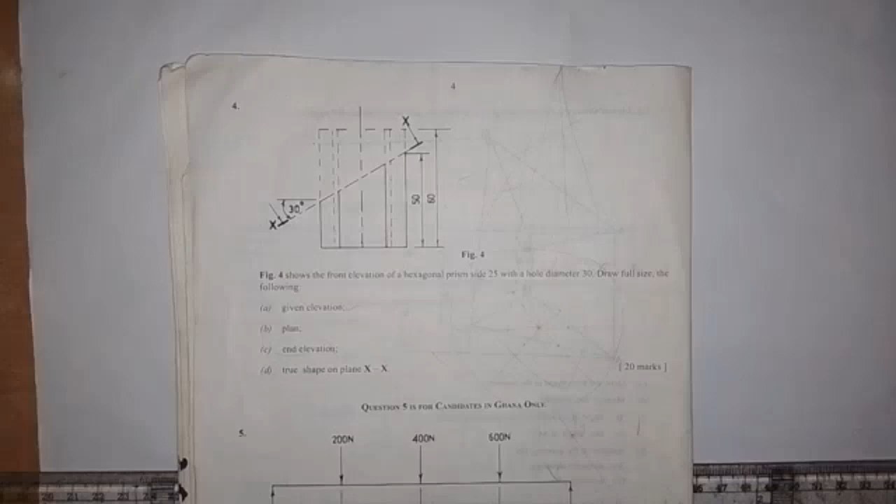Here we are going to solve this particular question, as you can see on the screen. Figure 4 shows the front elevation of a hexagonal prism, side 25, with a hole diameter 30. Draw full size the following: A, given elevation; B, plan; C, end elevation; and D, true shape on plane XX. So we'll be showing you how to solve this particular problem.

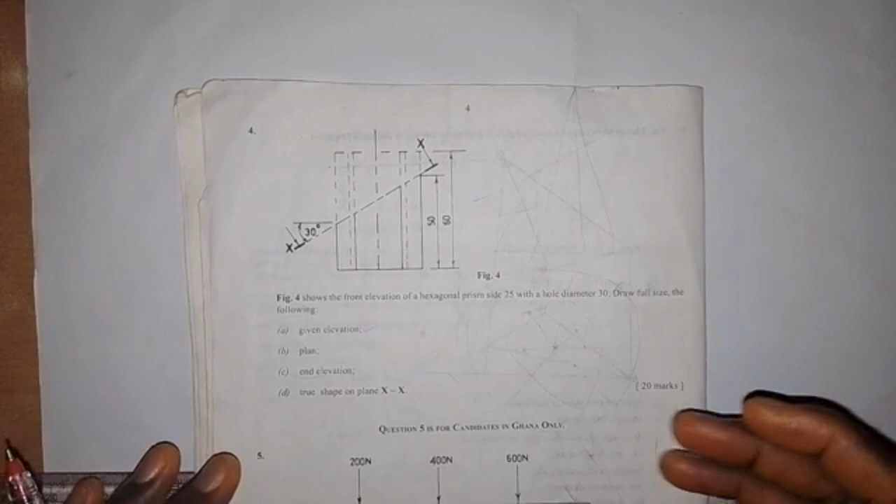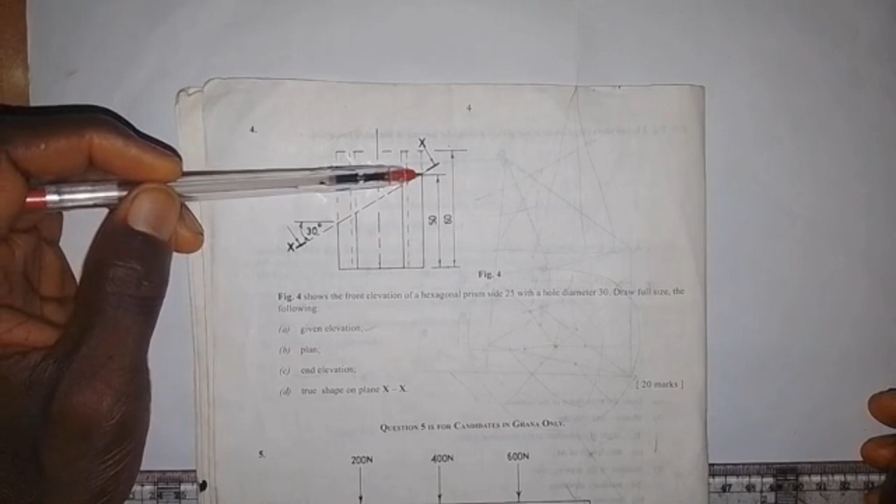Okay, so now let's do what we're asked to do. But before that, the height of the prism is 60 millimeters, and the cutting plane touches this point, and the distance of this point from the base is 50 millimeters. The cutting plane is inclined at an angle of 30 degrees to the horizontal, as you can see there.

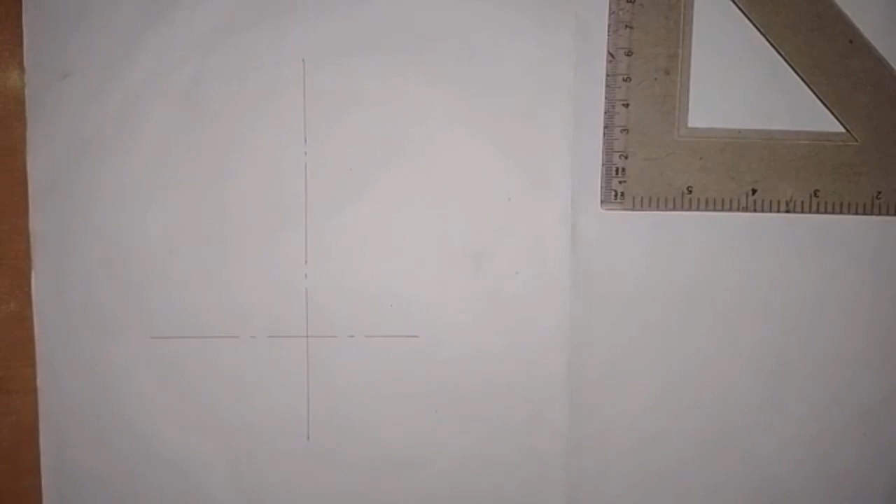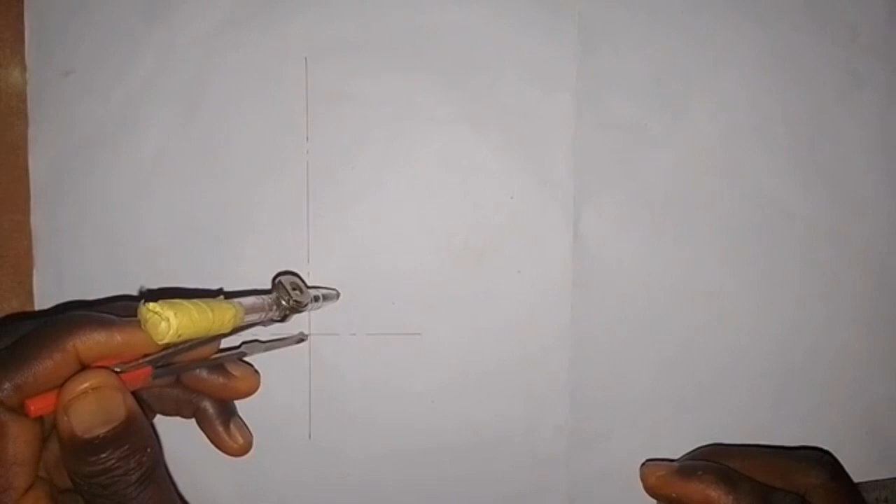So what we need to do first is to draw a vertical center line. So we draw a vertical center line, you can see it here. Then we also draw a horizontal center line. Then we take a measurement of 25 millimeters, which is the length or side of the hexagonal base of the prism. So we put it at this point and we draw a circle like this.

Then I will need to extend this line. With the same radius that we used to draw the circle, we put it at this point, then we make an arc here and down here, and at this point also with the same radius, make an arc here and down here. So I'm going to number these points: point 1, point 2, point 3, point 4, point 5, and point 6 here.

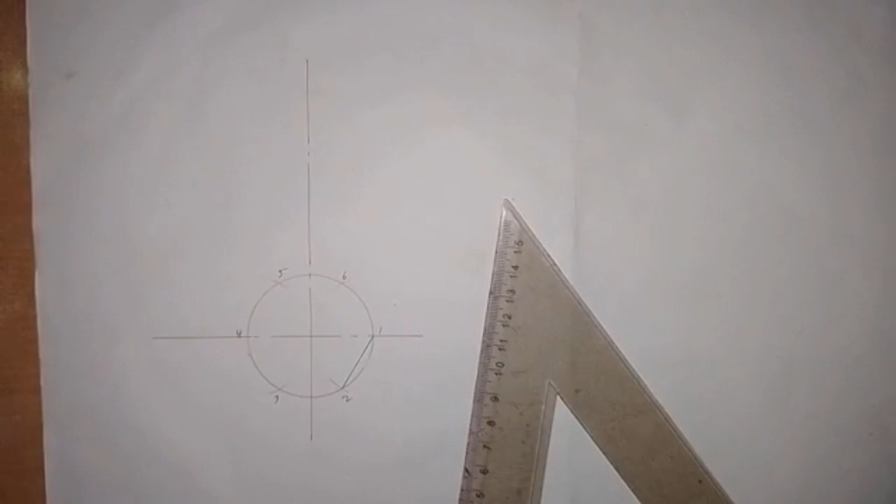So we join these points together to form the hexagon, like this. I'll pause the video and quickly do that. Alright, so I've produced the hexagon as you can see here.

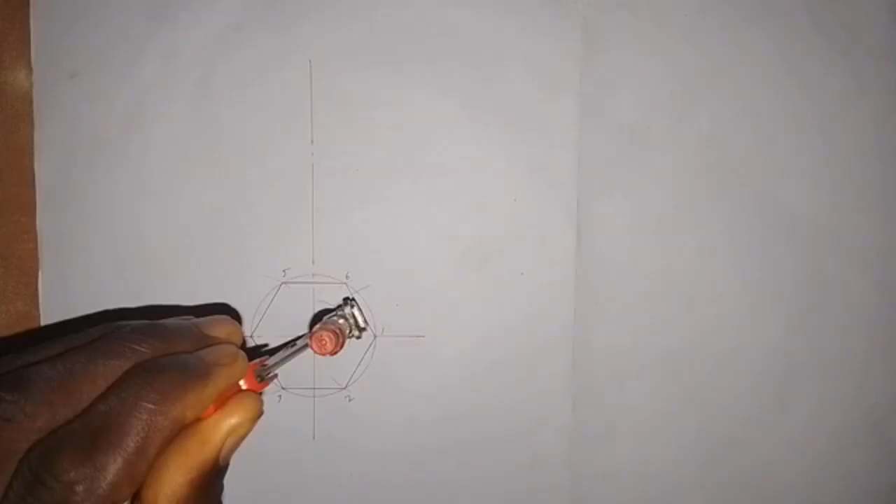The next thing we're going to do is to draw a circle in here, because we are told that there is a hole within the prism, and the diameter of that hole is 30 millimeters, which means the radius is 15 millimeters. So we take a measurement of 15 millimeters, put it at this point, and draw the circle like this. Alright, so that is the circle.

Next, we come up a little bit and draw a horizontal line. Then from point 1 here, we draw a vertical line. Points 2 and 6 are the same point on the circumference of the circle, so we also draw a vertical line from here. Points 3 and 5 are the same point on the circumference, so we draw a vertical line from 5. And from point 4 also, we draw a vertical line like this.

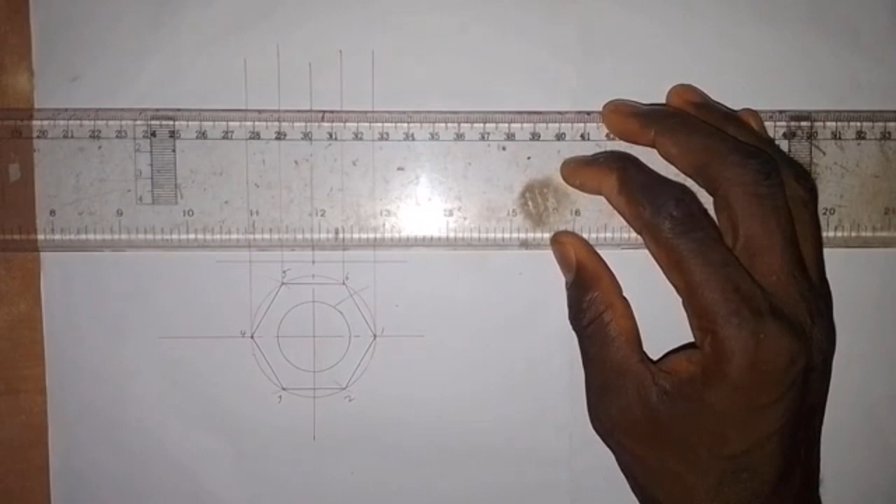Then from this point here, we take a measurement of 60 millimeters, which is the total height of the prism. So this is 60 millimeters here. I'm going to draw a horizontal line from this point like this. Then I will take 50 millimeters from here. This is 50 millimeters here.

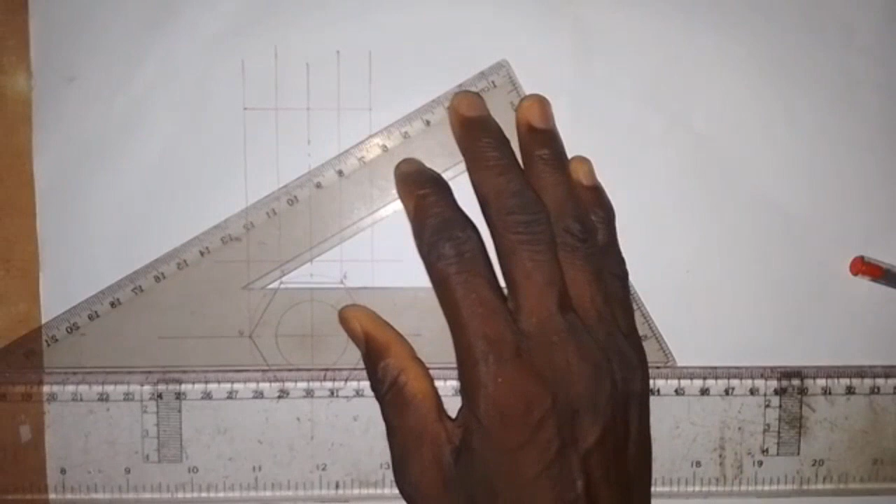The next thing I'm going to do is take my 30 degree set square, setting it at this point like this, and I will draw the cutting plane. So the cutting plane goes like this. That is the cutting plane XX here. I'll call this X, and this is X here.

Next, I'm going to make this line a thick line, from here to here, and this line will also be a thick line, from here to here. This line here will be a thick line from here to the base, and this also will be a thick line, from here to here. Then I will take in this baseline.

Alright, so that is for the hexagonal part. So we also need to show that of the circle. But before that, I'm going to divide this circle into 8 equal parts. So with my 45 degree set square, I can divide it like this.

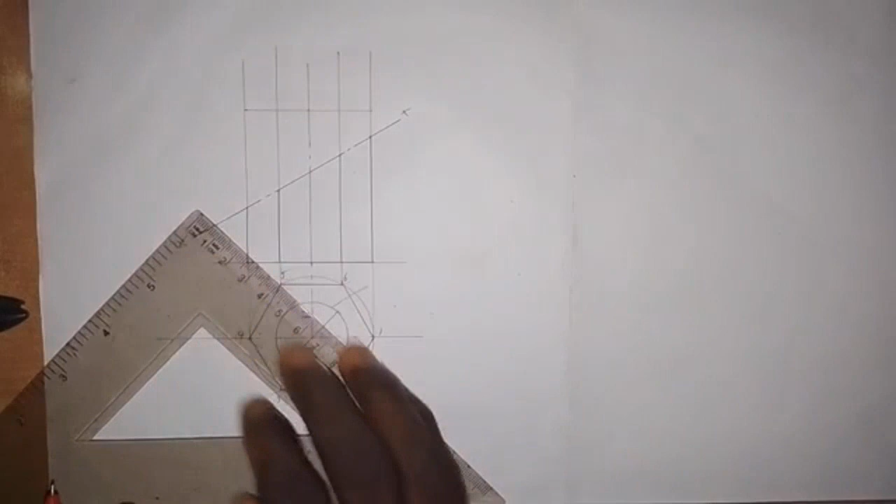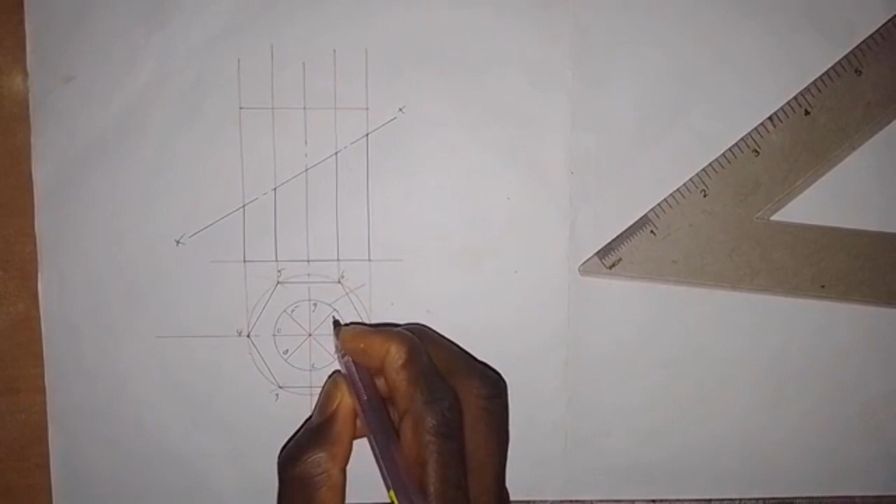So then, so we also have this. So these points I'm going to label. So I'll call this point A, this is point B, this is point C, this is point D, this is E, and this is F, this is G, and this is H. Alright, so then these points I need to draw into the prism.

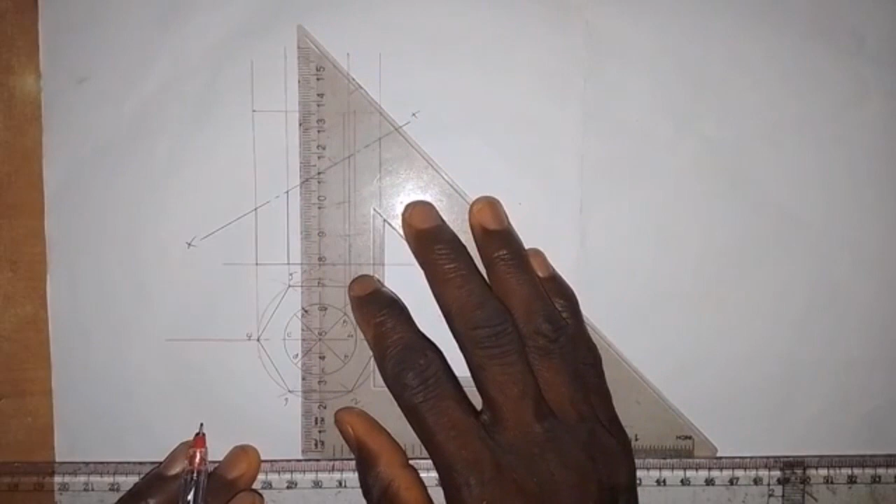So this point A here, I will draw a vertical line like this, and then point B and H, they are the same point on the circumference of the circle. So I will draw a vertical line, and I've drawn that of C and G. So F and D, they are the same point on the circumference of the circle. So I'll draw a vertical line. Then for point E here, I will also draw a vertical line.

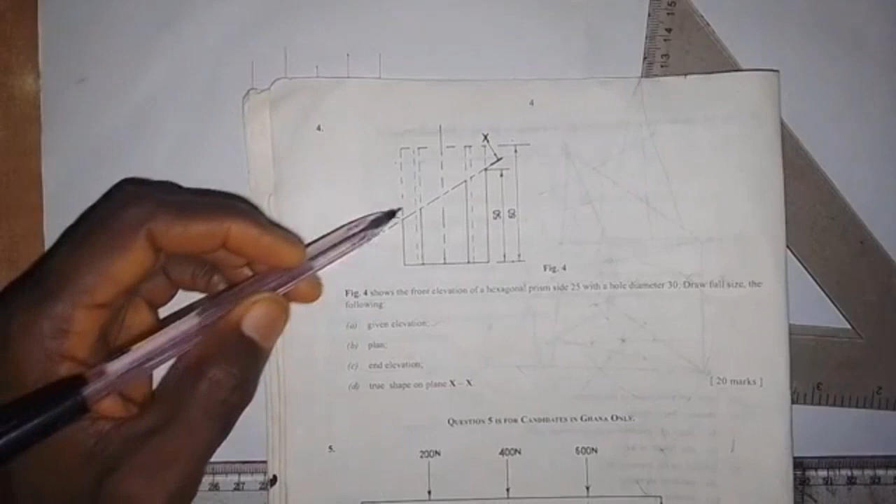Okay, so now from the drawing that we are given in the diagram, this line is a hidden line. So this line here is for point E, and this short dashes line is for point A. They drew them with short dashes because we cannot see the hole in the prism. So we do the same thing here. I only need these two, so I don't need to make other ones short dashes lines. Okay?

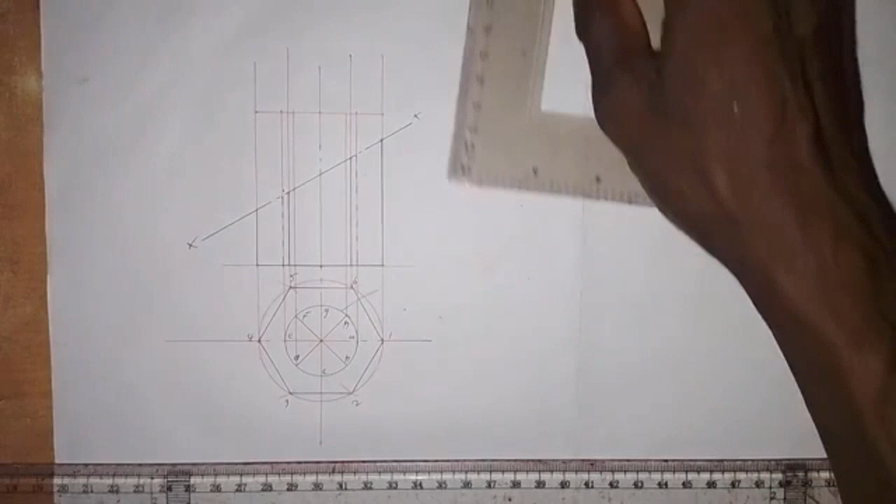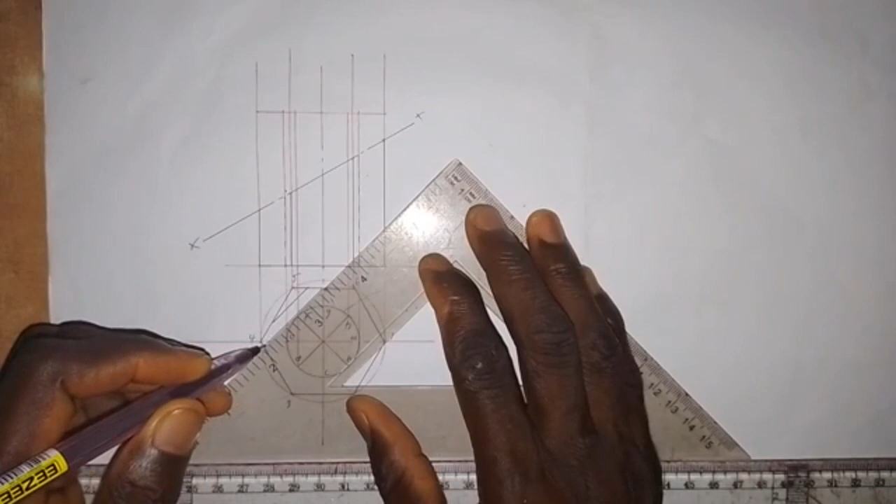Alright, so the next thing that we are going to do is that this part is cut off, and though it's a hollow object, we have a solid part, which is around here. So to complete the plan, we need to hatch this surface in the plan. With a 45 degree set square, we do hatching lines to show that part of the object is cut off.

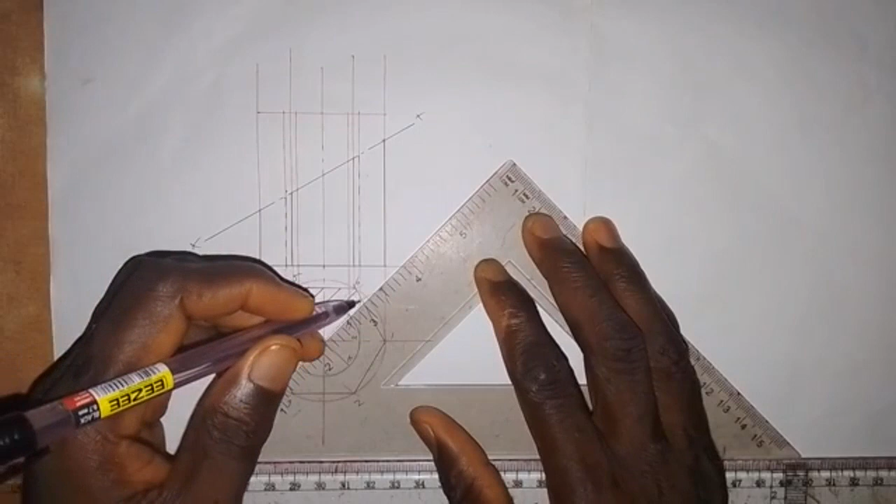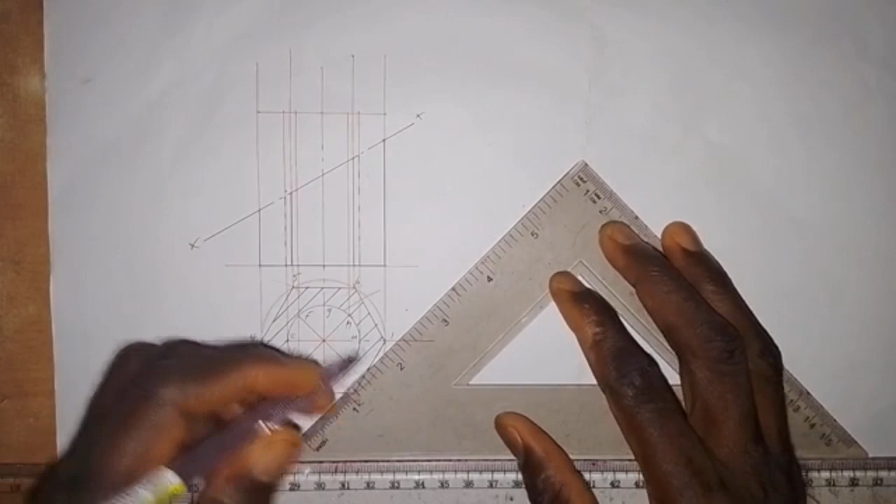Okay, so we are producing the hatching lines on this surface. The hatching lines will not pass through the circle. Alright, so that is the complete plan as we expected to do it. We have answered question A and B.

So the next thing is to answer question C, which says that we should draw the end elevation. To draw the end elevation, we need to extend this line, which contains 2 and 3. So draw a horizontal line to this side, and also extend this line to this side, and then extend this line to this side. Okay, so this line contains 5 and 6.

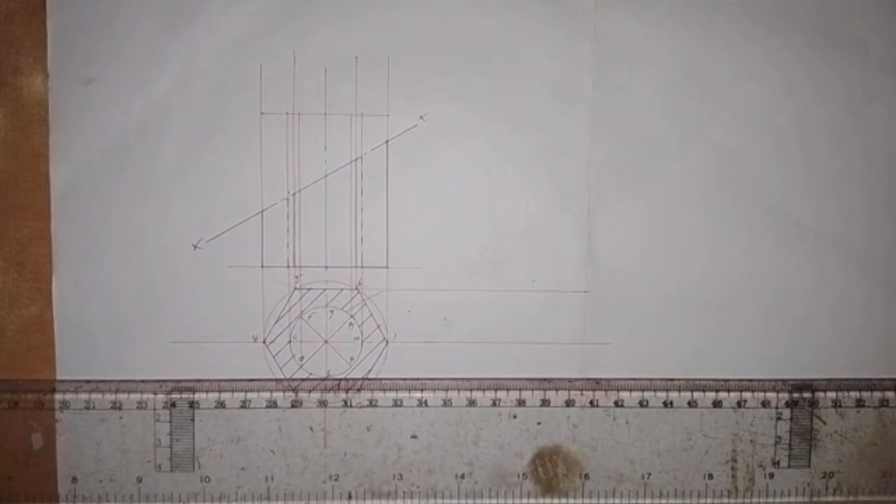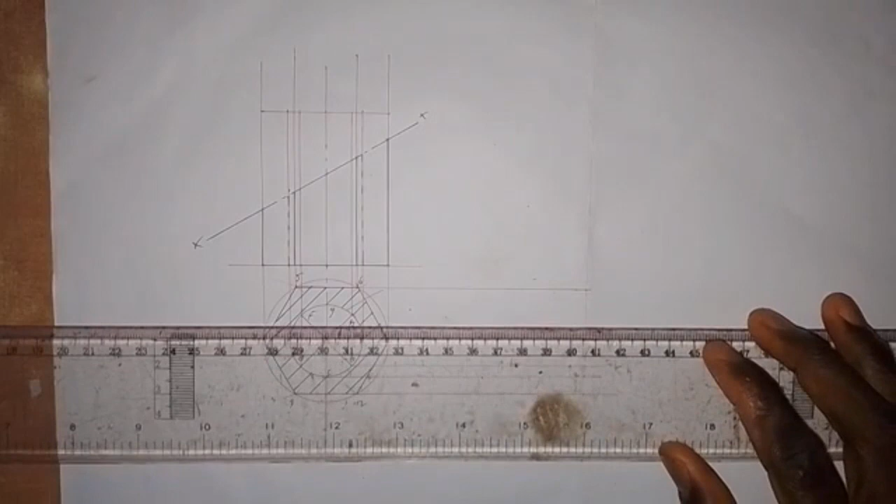So now from this point C here for the circle, draw a horizontal line like this, and this point contains B and D, so draw a horizontal line from B. And this point here, we have drawn that of A and E, which is also for 1 and 4. Then this point contains H and F, so draw a horizontal line from here. And then this is point G, draw a horizontal line. That is on the circle, as I've explained before.

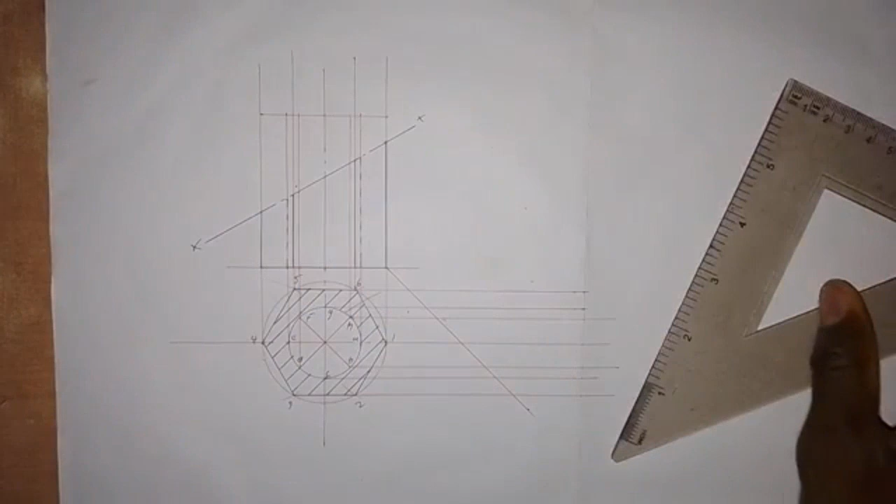So then we take our 45 degree set square, setting it at this point, and we draw a line in this direction, like this. So this line contains 2 and 3. This is for point C, so we have C here. And then this is BD. So this point here, and this point, and this point here.

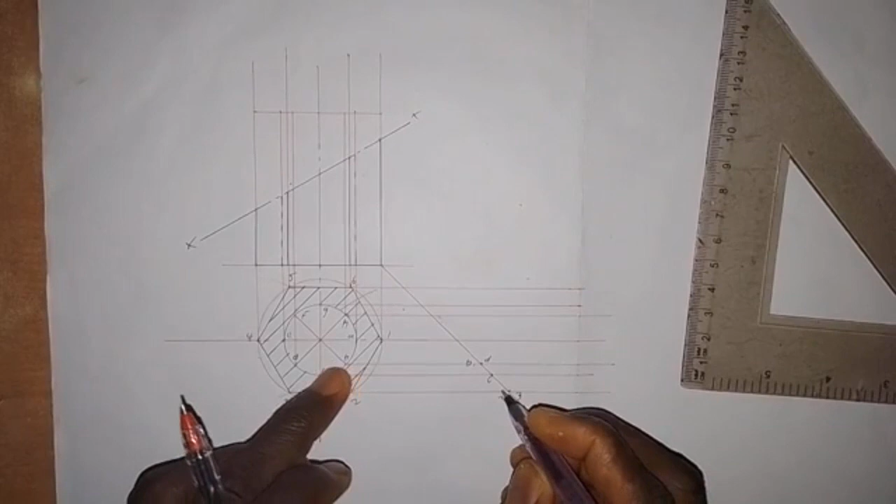Then this contains 1, 4. Then we also have AE here. 1, 4 and AE. Then this is HF. And then this is G, so here we have G. So this is 5 and 6. Okay, so let's take note of that. All these points are what we are making use of.

Alright, so what we need to do now is that first of all, we start with the center, with a vertical center line. So we draw a vertical center line from here.

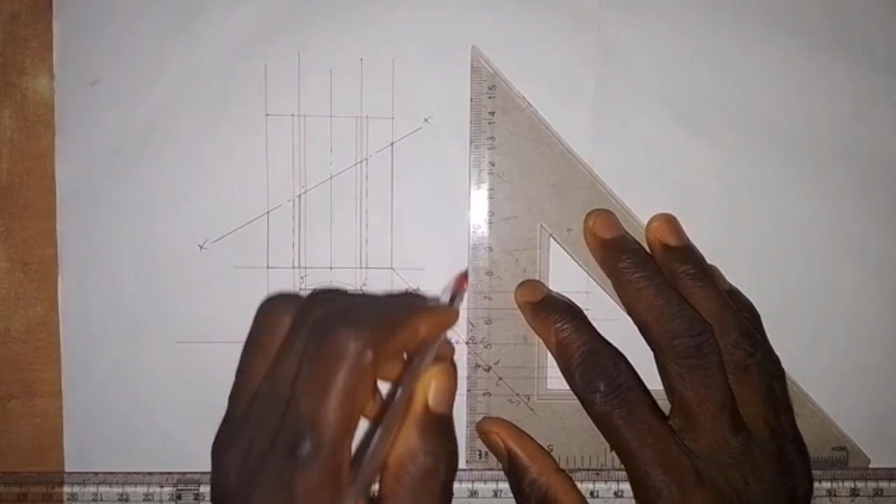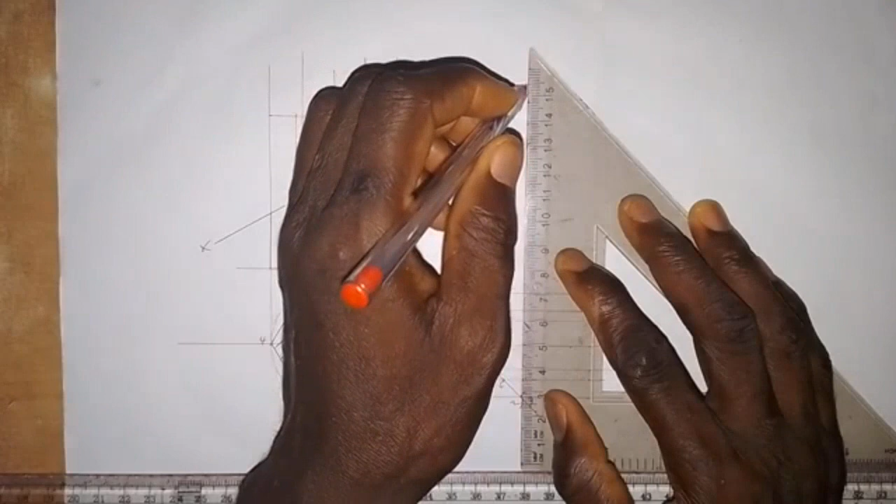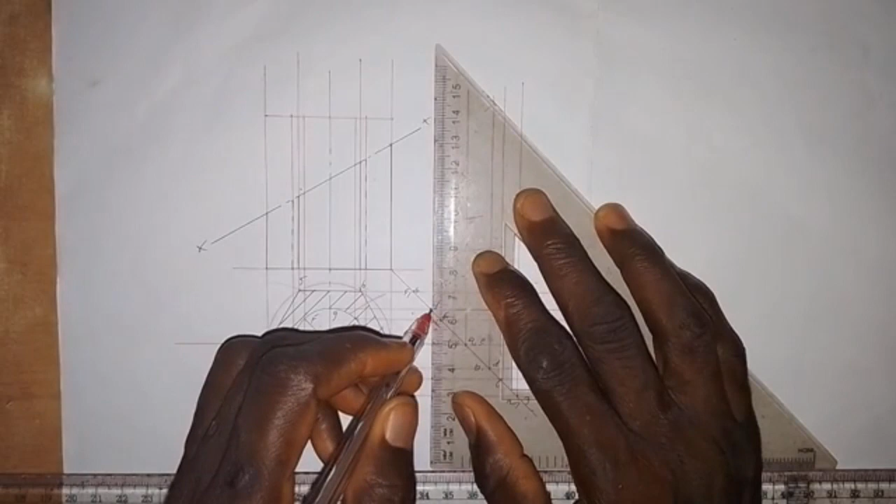Okay, then, for all these points, we draw a vertical line for 2 and 3. So we draw a vertical line like this. For point C, we draw a vertical line. For BD, we draw a vertical line. And also we have done that of 1, 4 and AE. Then for HF, we draw a vertical line. For G, we draw a vertical line. For 5 and 6, we draw a vertical line.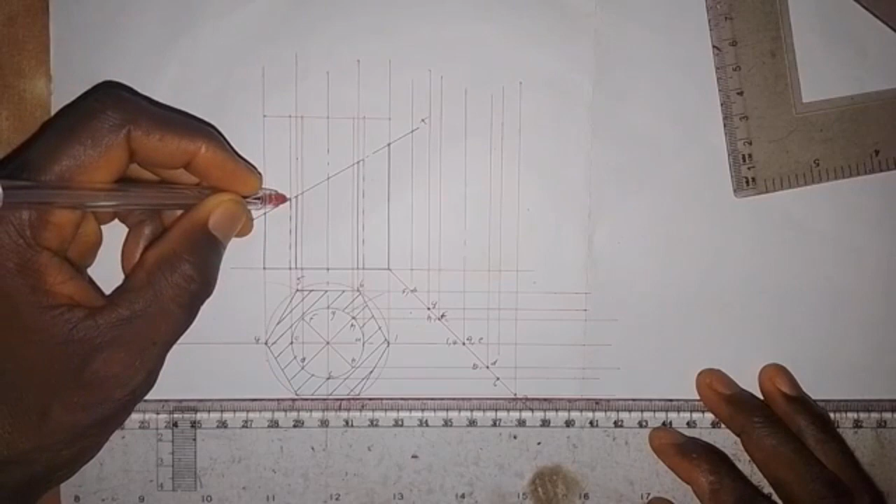Alright, having done this, we need to extend this horizontal line. So we extend this horizontal line. Okay, what we need to do now is that from the point where the cutting plane touches each of these vertical lines, we are going to draw a horizontal line. So we draw the horizontal line like this. Okay. So here we draw the horizontal line, and we don't need to draw for this one so that it will not confuse us, because there's no point on this line, so we don't have to draw a line for it.

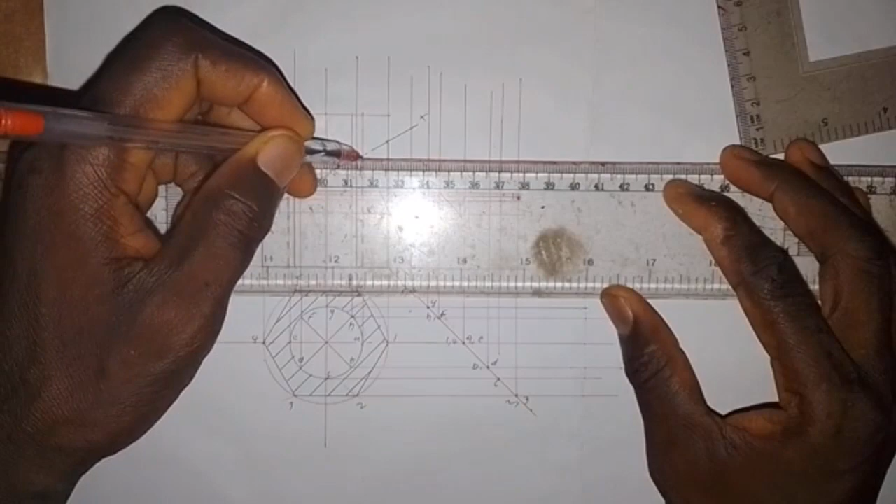Also for this point we will draw a horizontal line. So from this point here, we draw a horizontal line. Okay, from this point we draw a horizontal line, and also from this point here we draw a horizontal line wherever the cutting plane touches the vertical lines, apart from the center one. So the last one is this, so we also draw a horizontal line for this.

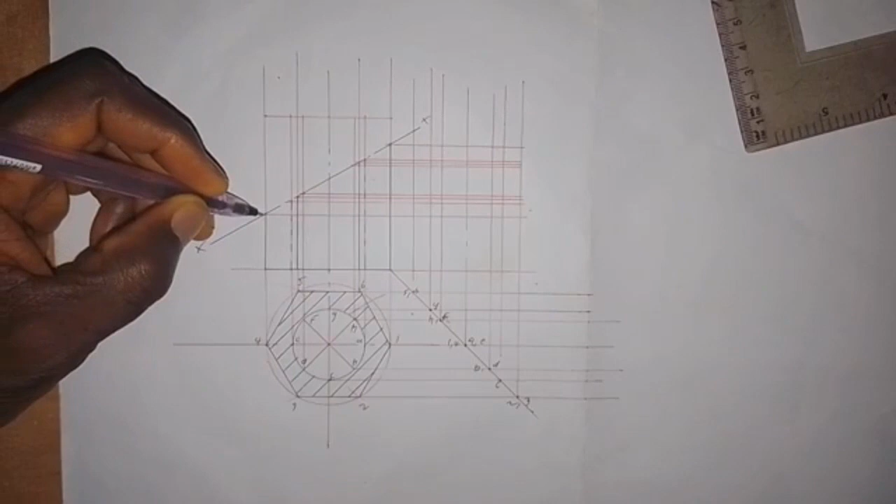Alright, I don't want to put the numbering or the labeling with letters here, but we are going to do it. So let's see how this is going to be done. Let's take note of what we have. Let's start with point 4. This is horizontal line 4. Then we come to vertical line 4 here. We follow this line with the horizontal line and the vertical line. They intersect at this point. So we take note of this point. Okay, so this is point 4. Let's get out of the hexagon first, then we go back and get out of the circle. Let's make it easy like that.

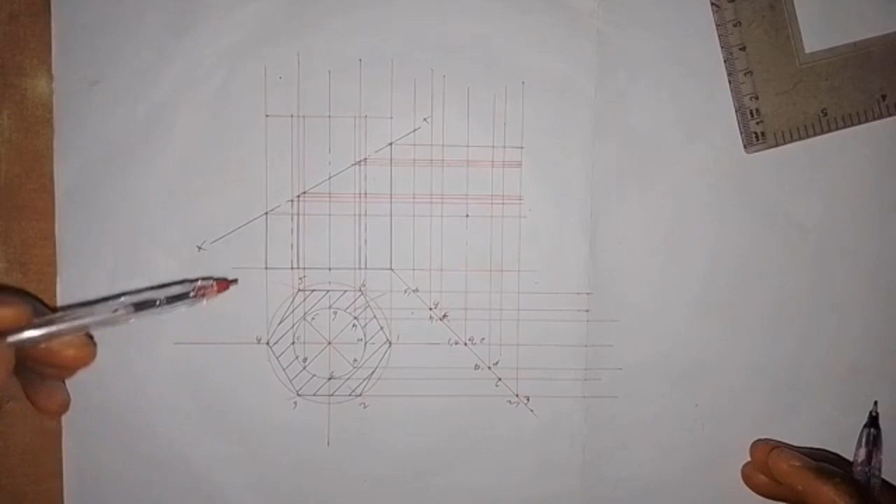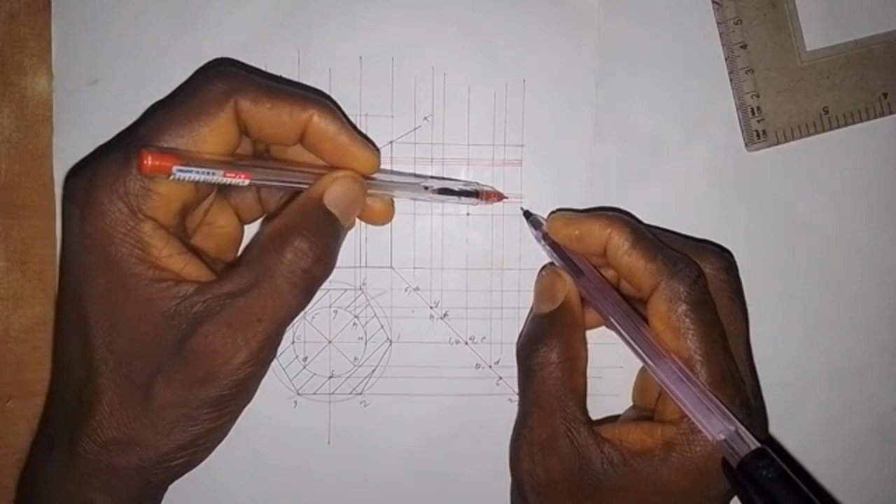So now, this is point 5 and 3. If you go on this horizontal line, just take your time, where do we have 5? We have 5 on this vertical line here. So this is point 5. Along this line we also have 3. Where do we have 3? We have 3 here, going up on this vertical line like this. So this is point 3. We take note of that.

Next, let's get that of 2 and 6. We go up on this vertical line. Just follow this number. We go up like this to this point. Let's start with 6 first. If I go on this line like this, and I go on this vertical line, this is point 6. Also on this horizontal line, for 2, going on this vertical line like this, this is point 2.

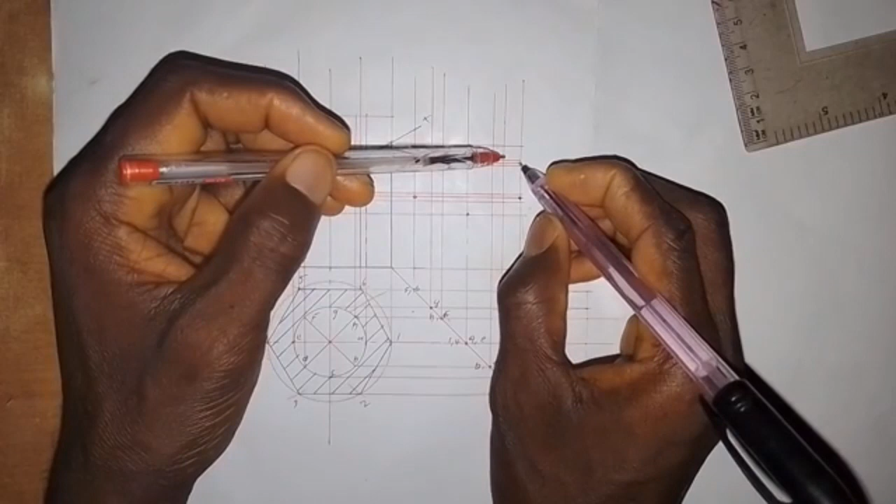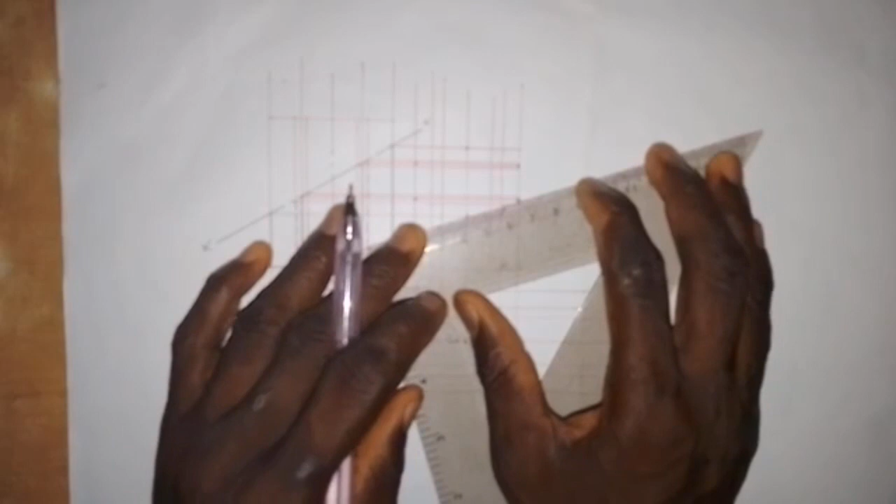Then the last one is point 1 on this vertical line. Going up, this is the point. And then going on this horizontal line, then this vertical line, we go up like this. So we have point 1 here. So those 6 points have been located for the hexagon. We are going to bring out this one. So we join this together. Then we also join this point together with this. Then we also join this together. Also we join these 2 points together. Join this together. So we have produced the hexagon, as you can see here.

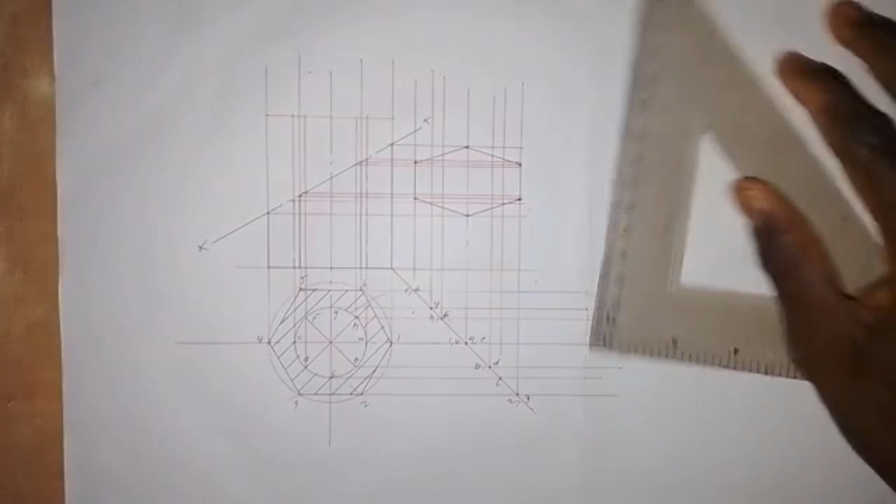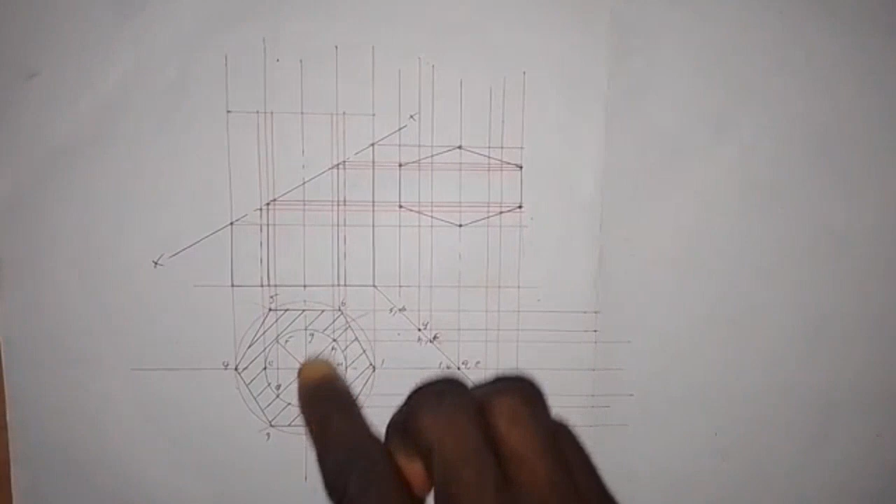The next thing that we are going to do is for the circle. Let's get the points for the circle. We still need to draw for this center because we have points on this line. Apart from the hexagon, which doesn't have a point on this center line, we still need to draw it. So we draw a horizontal line here.

So now let's locate the point for the circle. So let's start with point E here. So if I go up like this, this is the point here. So we go on this horizontal line. So where do we have point E? We have point E here along this center line. So we go up like this and look at where they intersect. They intersect at this point. So we take note of this point. So that is point E.

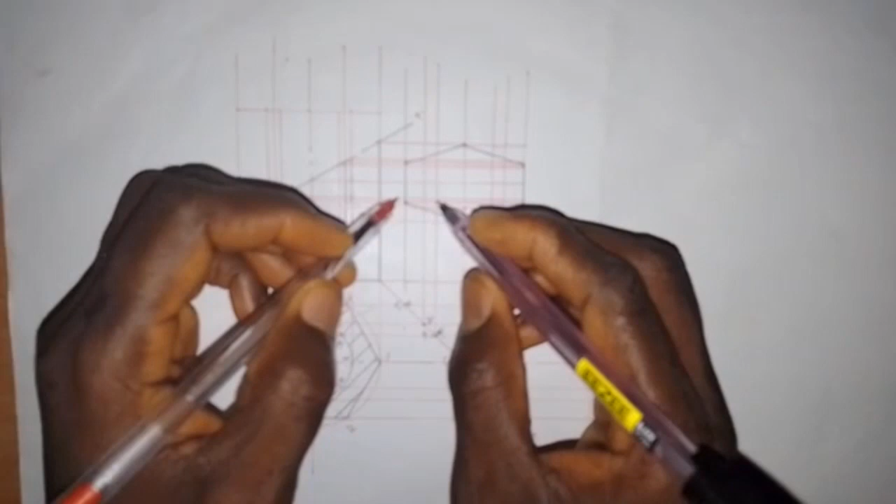Then next one we have DF. So if we go up on this line, this is the point. Then we go on this horizontal line. So let's get out point F. So we go up on this line. So we have F on this line, and we go up like this. So here we have point F. So what about point D? So we go like this. On this line we have D. So they intersect at this point. So we have point D here.

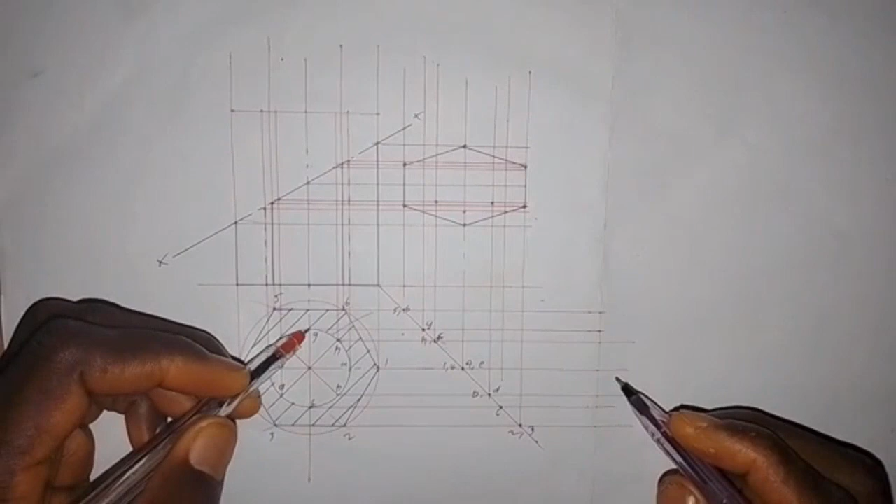Okay. Then next one we have CG. So going up like this, this point. So we go on this line. Where do we have G? This is point G here. So we go up on this vertical line. So this is point G. Then going on this line, look for C. So this is the line for C. So they intersect at this point here. So you just need to take your time to get this work done.

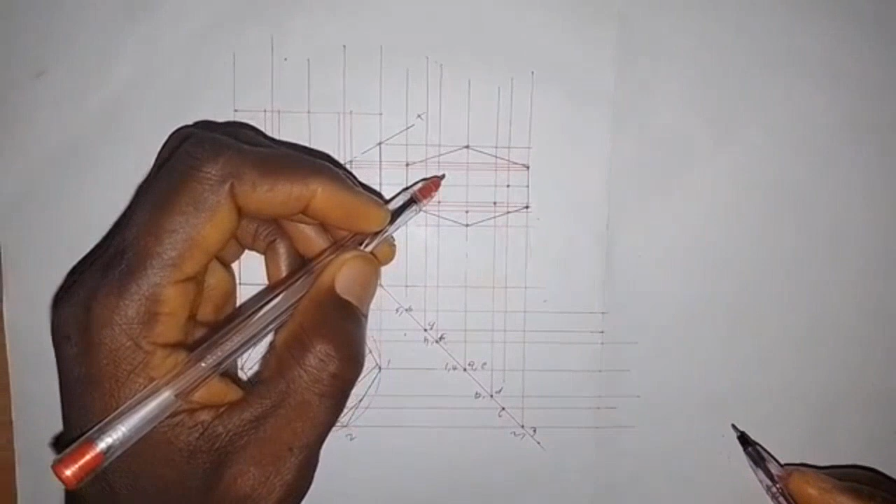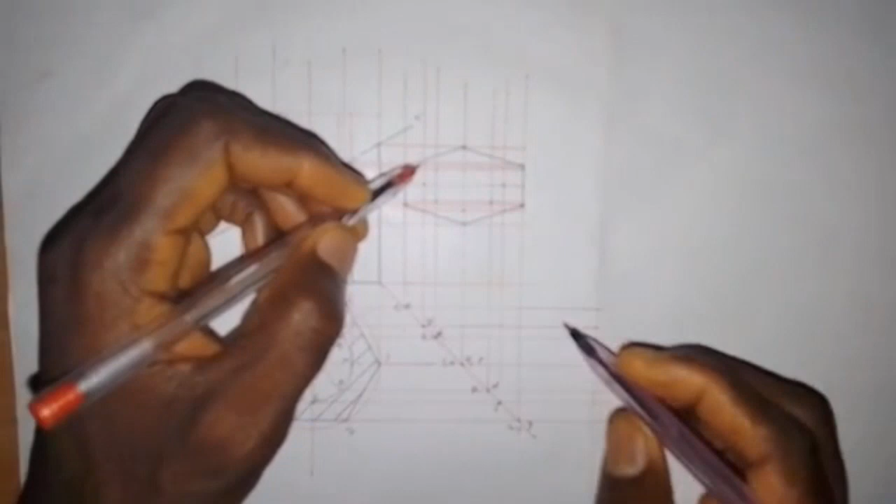So next one we have BH. So going up on this vertical line, this is the point. So we go on this horizontal line. So let's locate H. We have H on this line. So we go up like this. Okay, so they intersect at this point. So they intersect here like this. Then for B, so we go like this. So we go up on this line. So we have this point. This is point B here.

Okay. So last one is point A. So going on this vertical line, this is the point, and we go on this horizontal line. A is on this center line here. So we go here, and then we have A at this point.

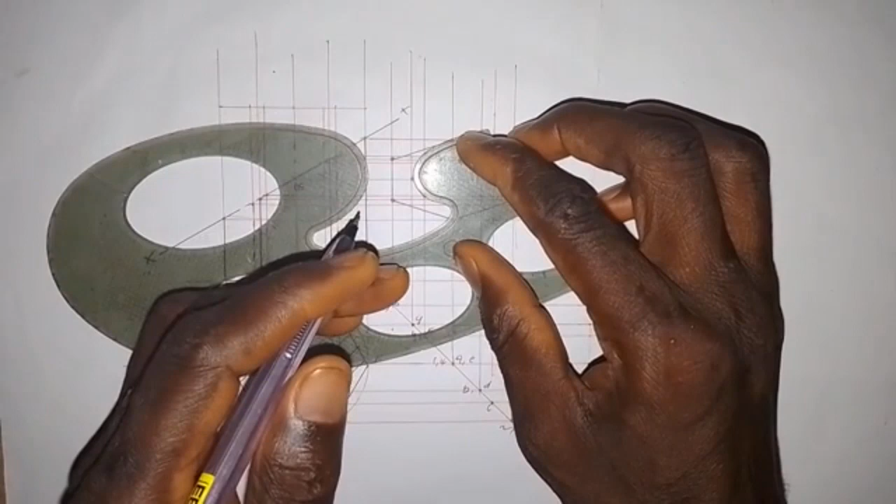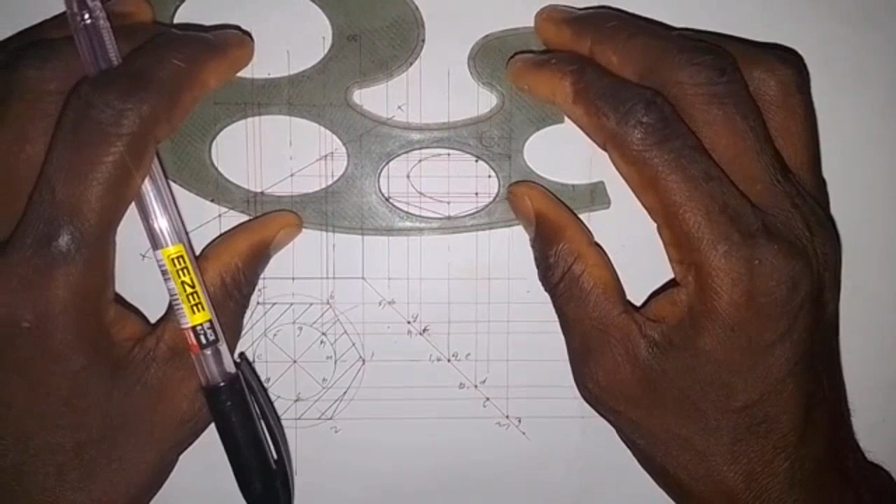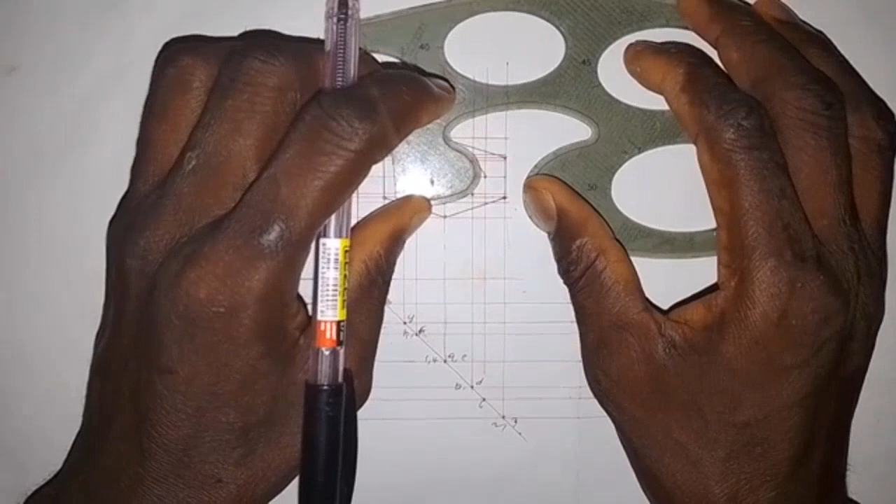Okay. So we are going to join this together with the use of a French curve. So we have to use this French curve to join this together. So we take it easy. So to join, like this, and so we don't have to rush ourselves in getting this done. So just take it easy.

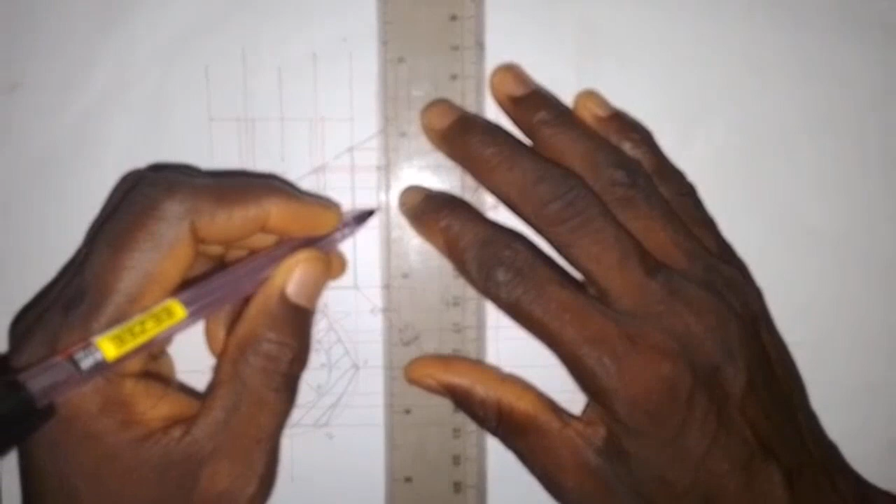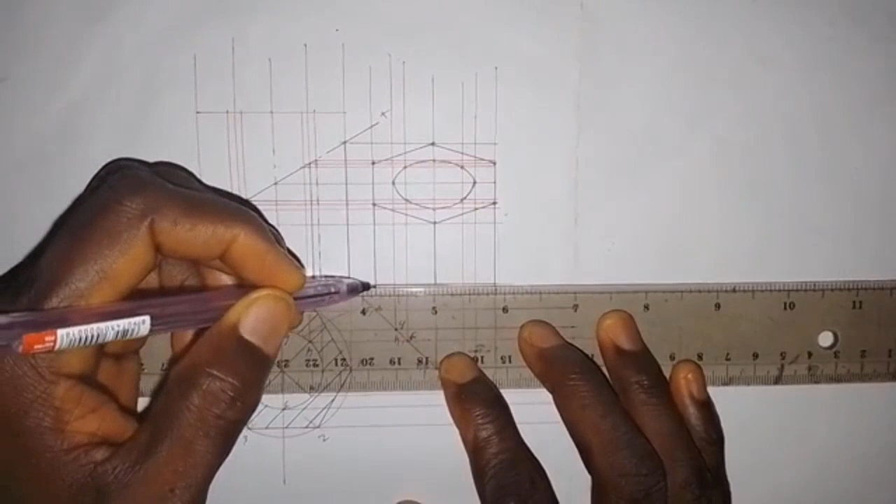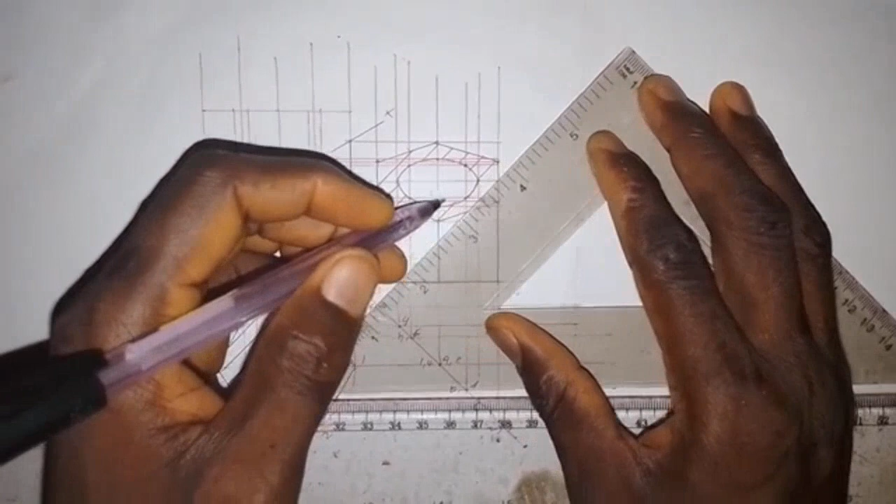Alright, so we are not done. We also need to show that this part is cut off in the end elevation. So we need to hatch this surface. So produce the hatching lines like this. Alright, so that's it. So we have answered question C. Now let's go to question D.

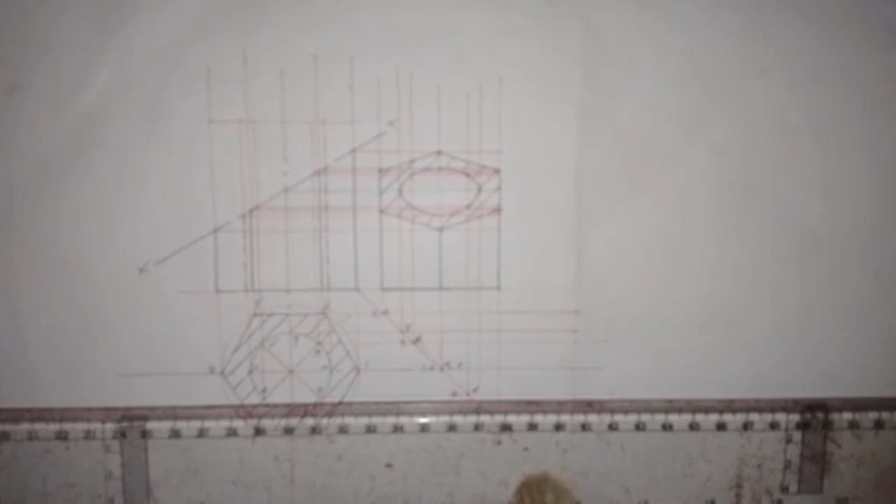So it says that we should draw the true shape of the cut surface on plane XX. So how do we do that? Since the cutting plane here is inclined at an angle of 30 degrees, we have to make use of our 60 degree set square, the 60 degree side, to draw a line at right angles from each of these points that we have on the front elevation. So we draw a line in this direction, and from this point we draw a line for each point that we have. So I'll pause the video while I do that.

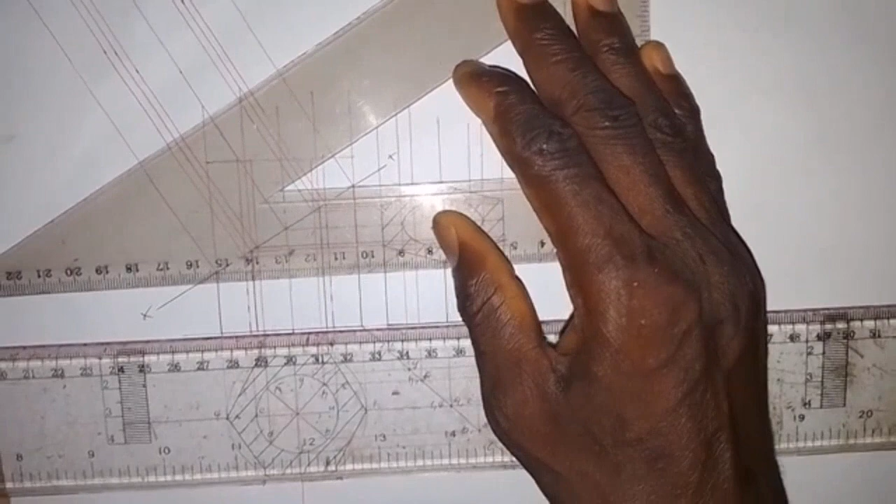Alright, so having drawn these lines perpendicular to the cutting plane with the 60 degree side of our set square, we take the same set square, the 30 degree side, and we are going to draw a line parallel to the cutting plane.

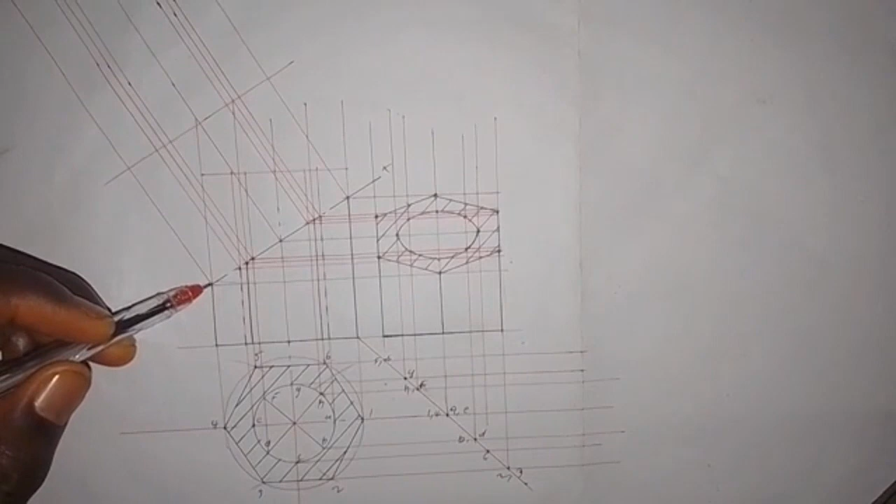So we use the 30 degree side like this. I'm going to manage this space, so we draw a line like this. Okay, now we need to locate the point, but first of all, this line here is 4, so this point here is point 4. Then if I follow this one, this is 1, so this point here is point 1.

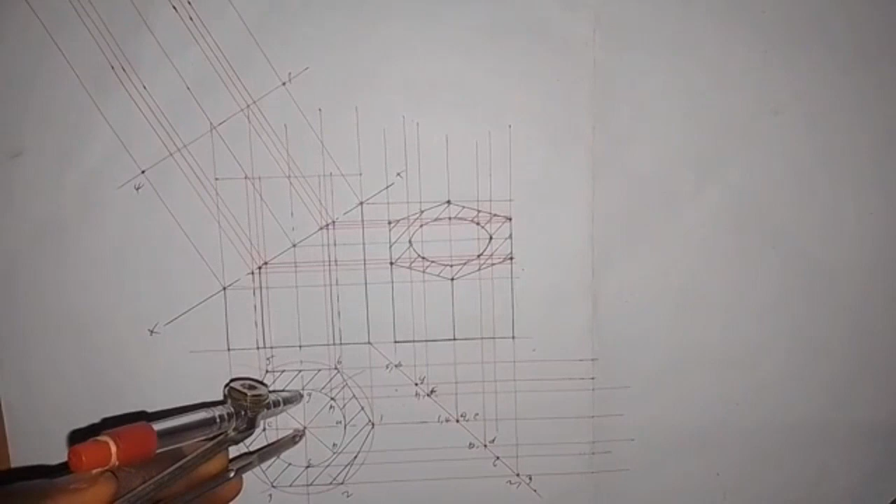So we now need to locate that of 2, 6 and 3, 5. What we just need to do for that is to take our compass and take the distance from the center to this point. So as if we are taking it to point 6 from the center, or point 5, or point 2, or point 3 from the center. So just take this distance here.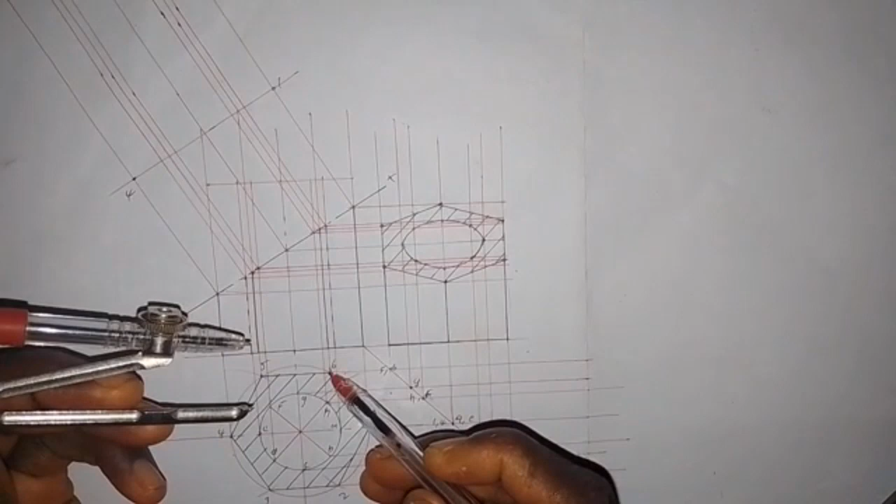So this line here is for 2 and 6. So go up like this, just take note and go to the middle here, to this point. So you make an arc on this line, and you make an arc on this side too.

The same thing, with the same radius, come for 3 and 5. This is 3 and 5 here. I'm going like this on this line, so we have this point in the middle. Make an arc here, and also make an arc here. So we have done that of the hexagon.

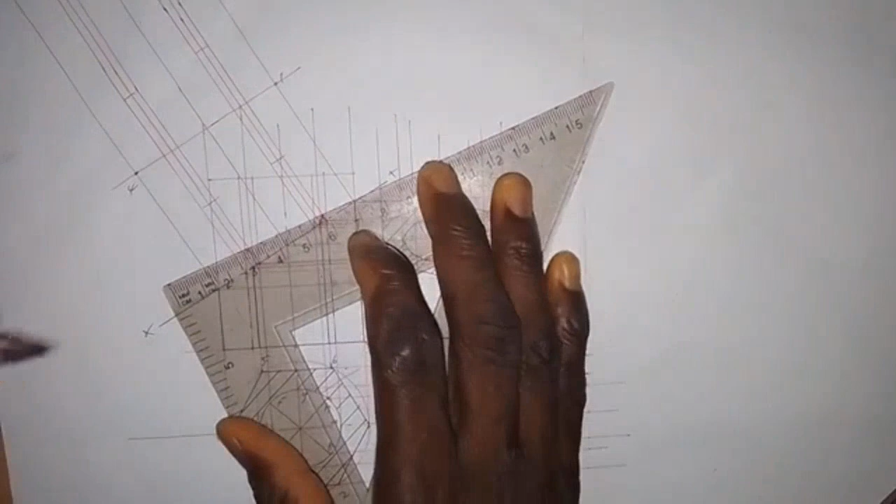What we need to do now is to join these points together. Let me number this. This is point 2, this is point 3, this is point 4, this is point 5, and this is point 6. So we join them together like this. 5 and 6, we join them together.

Then we join 3 and 4. Then 4 and 5. We join 6 and 1. Then we also join 1 and 2 together. Like this. Alright, so we have done that of the hexagon.

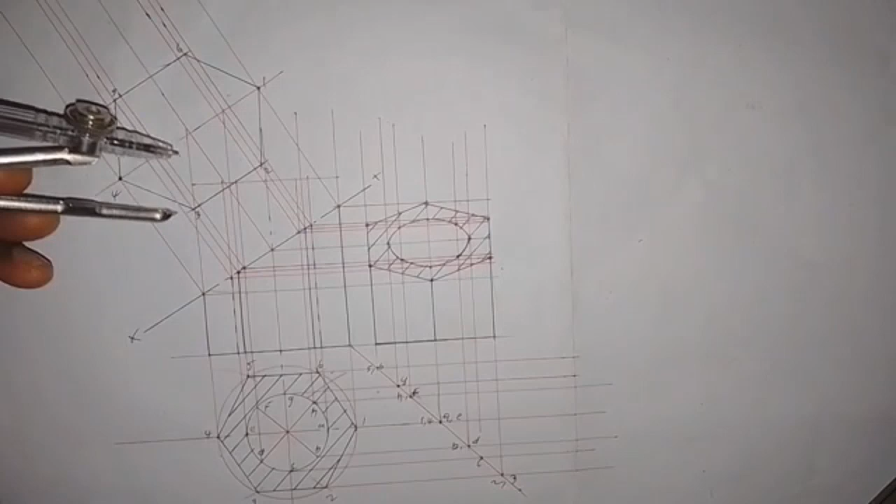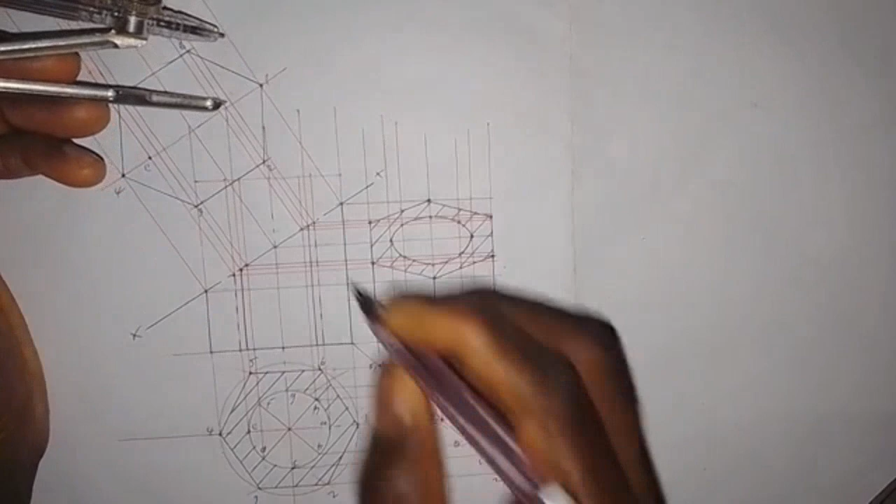The next thing that we're going to do is that of the circle. So how can we locate that? We take our compass again. Let's locate point E. On this line, we go up and go like this. So this is point E here, let me write it. Then that of A: if I go up on this line like this, this is point A here.

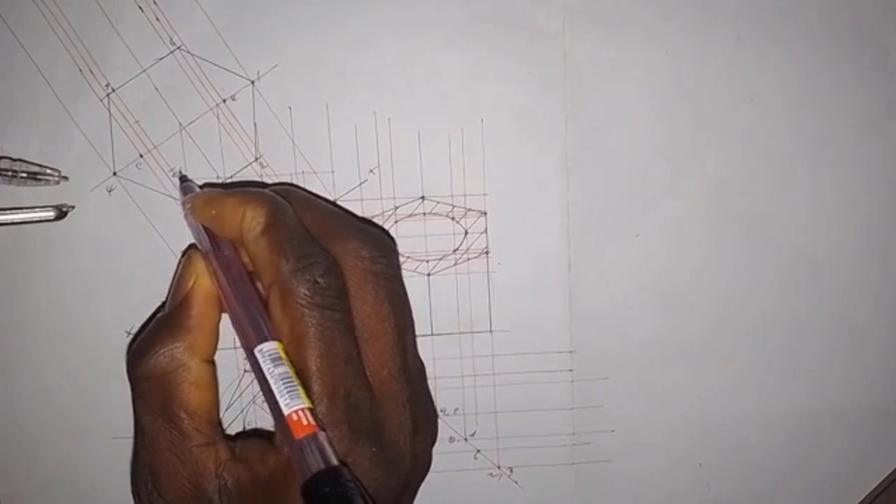Then for FD, from this center here, extend to F or to D, anyone you like. Then go up on this line like this, coming to this point here, I'll make an arc here, and then I'll make an arc here. So this is D, and this is F.

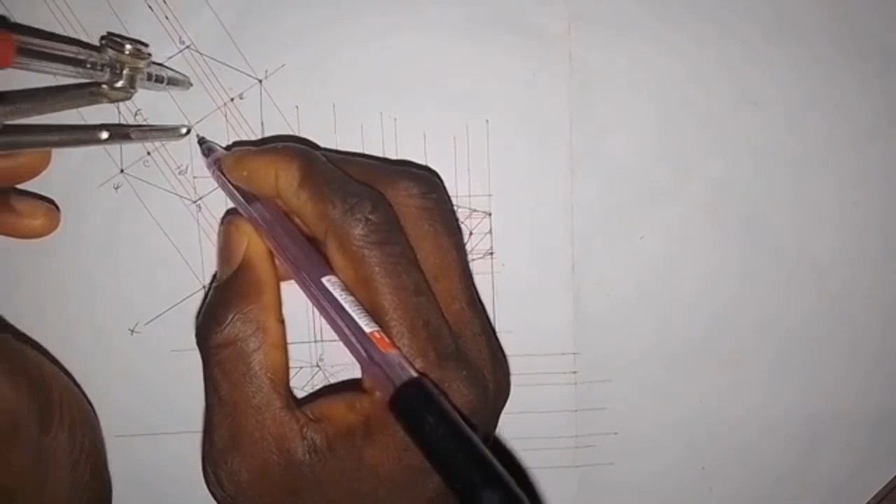Then for CG, from this point we extend to G or to C, anyone. Going up on this center line, we come to this midpoint here, then we make an arc here, and make an arc here. So this is point C, and this is point G.

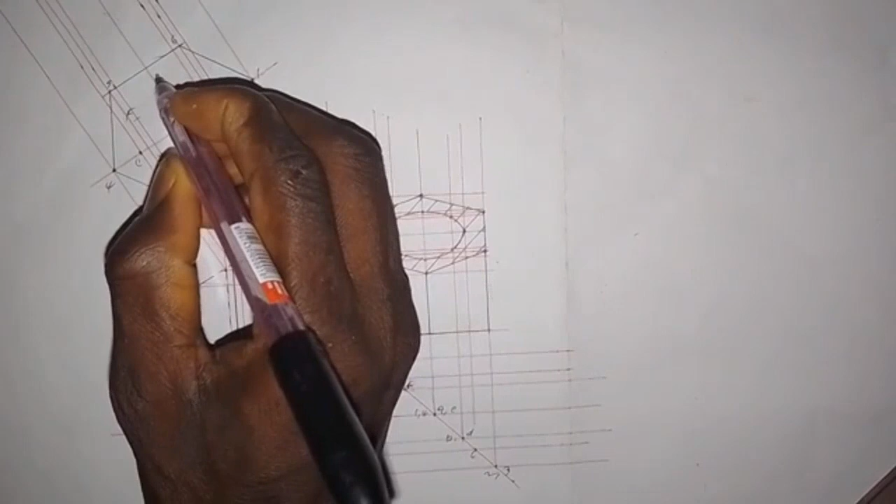Okay, next we have BH. BH is the same as that of FD, so I just need to come back here and take it; they are the same. Then follow this line on BH here, going up on this vertical line to this point here.

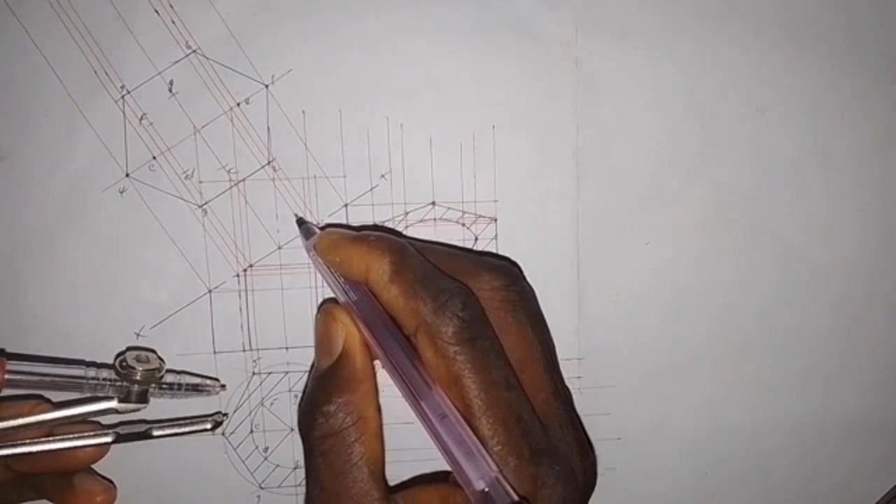We put it here and make an arc here, and make an arc here. So this point is point B, and this is H. Actually, this is A, not E. Okay, so these points we are going to join together with the use of a French curve. Join this together.

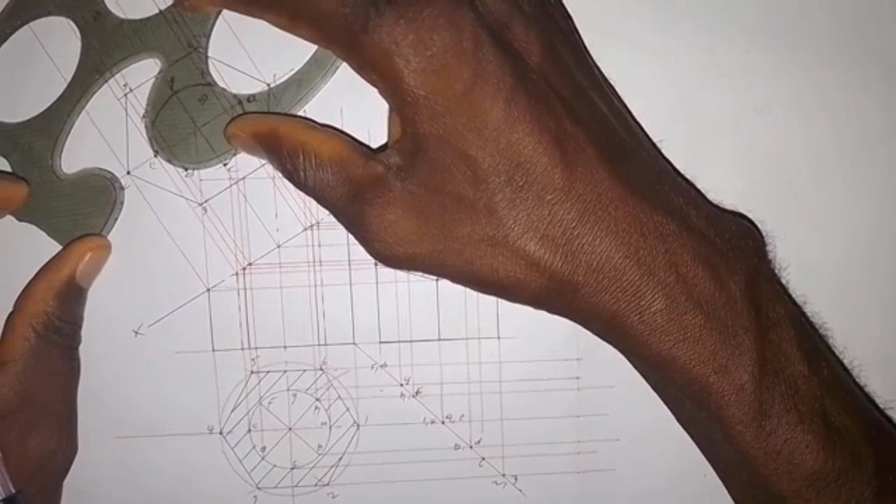Alright, so that is how that will look. Then with our 45 degree set square, we also hatch this surface like this. Done.

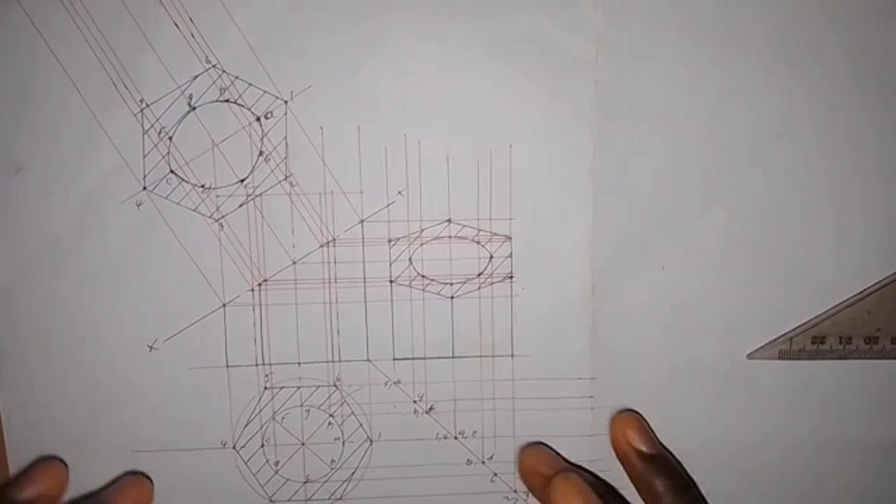Alright, so we have answered the 4 questions: the front elevation, the plan, the end elevation, and the true shape on plane X. It's as simple as I've done it here. With practice, you become a master at it.